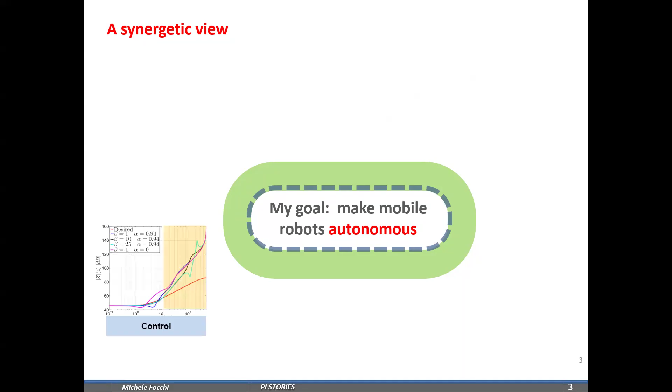To achieve this, we need to cover different topics from different fields. From control, we need a planner that generates trajectories based on the environment that is perceived, and a controller to track these trajectories and reject disturbances. We need some feasibility metrics to know when we are about to violate the physical constraints of mobile robots. In my case, I was working with quadrupeds, so I had many constraints, from friction, actuation, and kinematic constraints. Finally, also state estimation. It's important to feed back the state of the robot that might not be always observable.

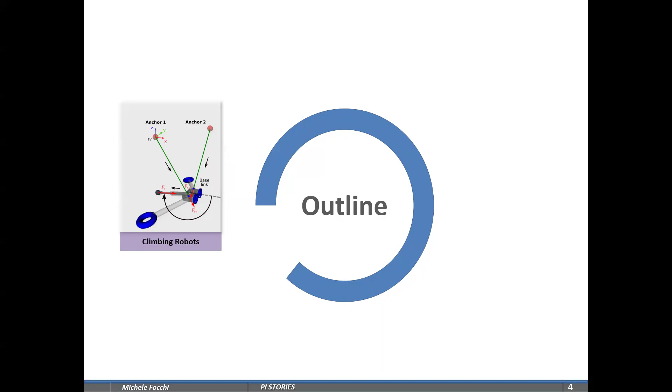The last ingredient is mechanical design, because a smart mechanical design can massively simplify the effort of the controller in achieving our desired goal. In this talk I will focus mostly on control and planning, and specifically I will talk about a few examples of new mobile robots. One is a climbing robot that I presented last year, which is now at the final prototype, so I will present the whole development of the idea. This is quite educational, from the initial idea to the final prototype. And also another work on reinforcement learning, quadruped jump, so making a quadruped learn to jump using reinforcement learning techniques.

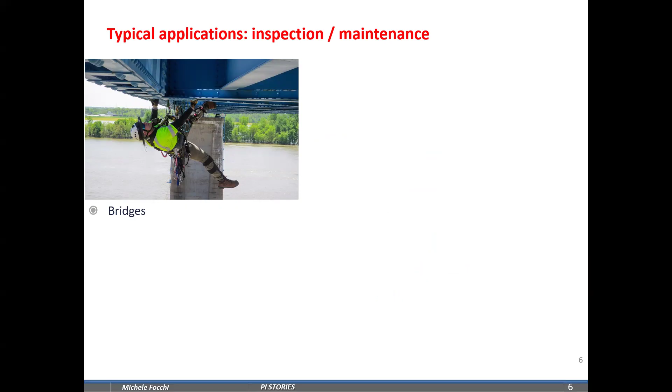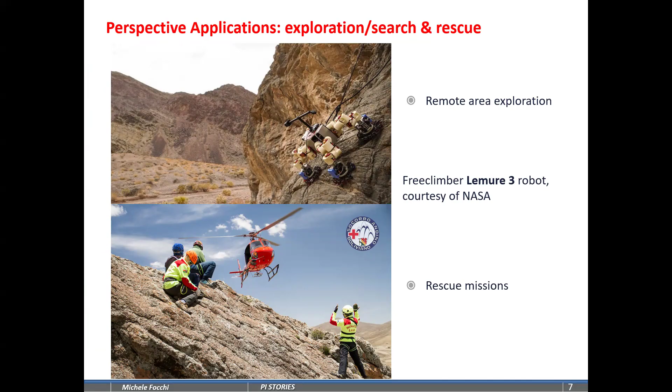First, let me give you a few motivations on why using climbing robots. They have a number of applications ranging from bridge structural inspections, that nowadays are done by humans with expensive scaffolding structures, cleaning of glass surfaces, especially for skyscrapers or high-rise buildings, and recently they've been employed in maintenance on wind turbine profiles. Other applications could be exploration of remote areas and rescue, bringing first aid in rescue missions. But the killer application that I foresee for this class of robots is related to maintenance operations in the heights, on the wall. This has not been explored yet, and this ranges from setting anchors to removing dangerous and unstable boulders from the rock.

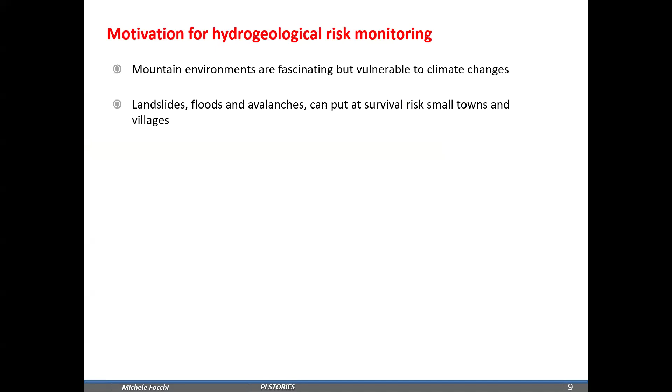Constant monitoring is needed, a maintenance activity to actually monitor the environmental condition and health of the rock walls. But these areas of interest are difficult to reach, and the maintenance operations are dangerous because they're mostly done by alpine guides or skilled personnel that are accessing this remote area through mountaineering techniques and executing maintenance operations while hanging from a rope.

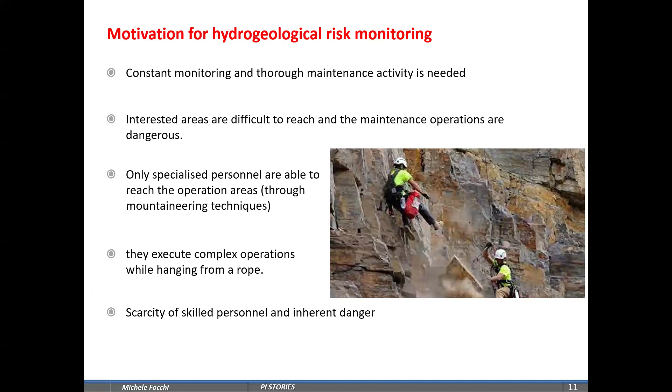And of course, there are not many alpine guides around, so there is a scarcity of skilled personnel, inherent danger, and also the vibration exposure these workers are exposed to. It should be limited by law. So this suggests the application of a robotic solution for this kind of application.

What are the requirements? So whenever we come up with a need, and we just motivated the need of this application, we come up to find some requirements to develop the ideas. And what could be the application requirements that are out of reach from the other solutions, that are mostly done by drones or robots that are crawling very slowly on the wall? First, they should carry heavy payload, and this is, for example, not possible with drones, and maintain a stationary position to perform a maintenance operation for a long time.

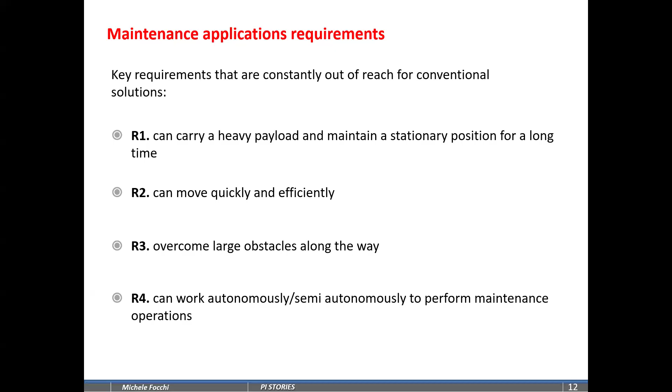They should be able to move quickly and efficiently on the wall, and also be able to overcome large obstacles along the way. For example, in case you have bushes, obstacles, trees that you need to avoid. And they need to be able to autonomously or semi-autonomously perform maintenance operations, for example drilling, expanding foam injection, or debris removal.

The concept is that this robot should be able to move vertically, horizontally, and also be able to avoid the obstacle, enabling some detaching from the rock wall, because the rock wall, as I said, is not a flat surface. It is very rough and there are many obstacles. Therefore, to be able to avoid obstacles, we need this ability to jump, to detach from the wall.

So taking inspiration from human climbers, we propose a robotic solution that is able to move and reach targets along steep mountain walls by exploiting a combination of two ropes that can pull the structure upward by some winch mechanism, so they can wind and unwind the rope and be able to reach any position on the wall, and a retractable leg. The retractable leg is an actuated leg that can push on the wall, initiating the jump.

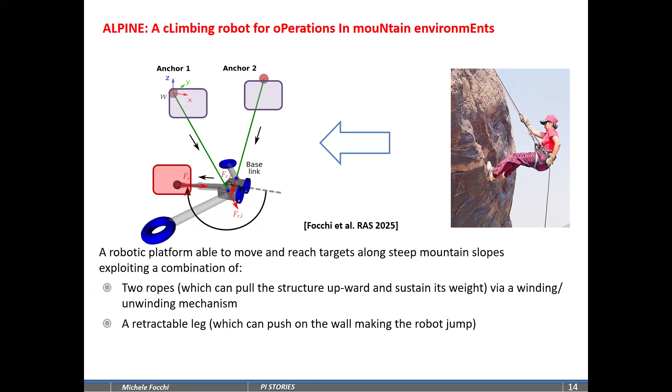Finally, some propellers could be added attached to the base to control the orientation. We will see later. Once landing, to avoid that the robot crashes on the wall in a bad way or tips over, a landing mechanism might be needed to be able to dissipate the excess of kinetic energy.

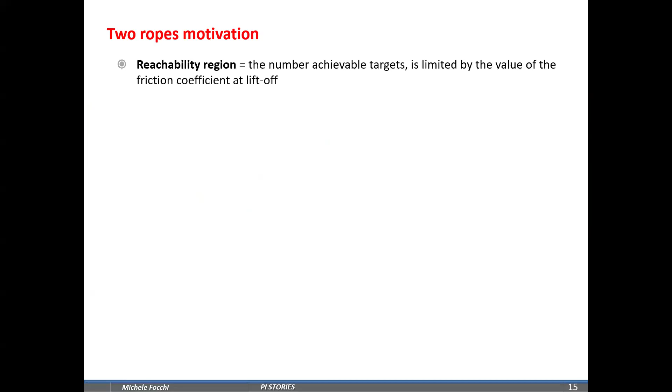The first idea was to use only one rope. So we came up with this robot with a single rope. As I said, research could be an iterative process. It means that you devise a solution, then you test it, and you find out that it's not the optimal one, so you want to do another iteration. And this is very normal in the process of designing a new idea.

And the problem of this single rope solution is that it massively limited the reachability of lateral targets. You see, the optimization we carried out for the jump motion was requiring a lot of effort from the electrical motor driving the hoist, the winches, to get out from the region limited by the friction cone.

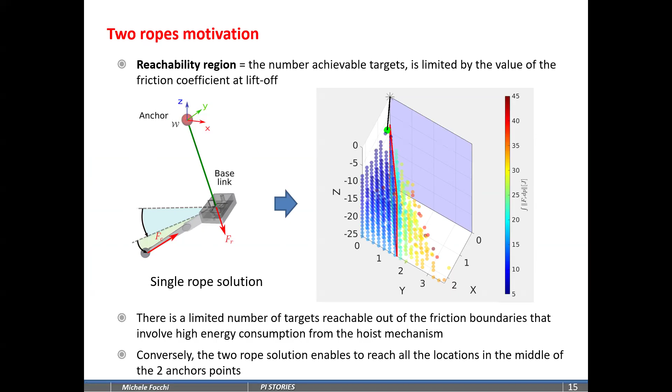So instead, the two-rope solution, adding another rope with another anchor point, both attached to the robot, enables us to relieve this problem and solve this issue. And all the points could ideally be reached, given that the actuators are strong enough, in the space between the two anchor points.

This solution enables us to satisfy all the requirements, because, for example, if we put brakes on the hoist, keeping the ropes in a certain position, we are able to keep any stationary position on the wall without consuming significant energy. So we satisfy requirement 1.

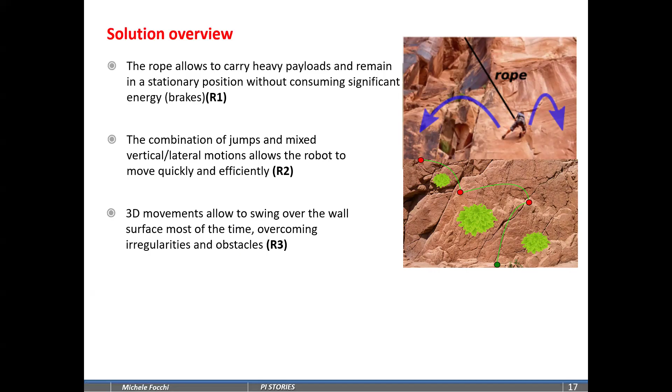Requirement 2 was about being able to move quickly and efficiently, and mixing lateral and vertical motion, we are able to move very fast, taking jumps. And taking jumps also allows us to swing over the wall and overcome the obstacles. Finally, a landing mechanism allows the robot to dissipate the kinetic energy and stay firm on the wall and be stable to perform maintenance operations, which was the fourth requirement.

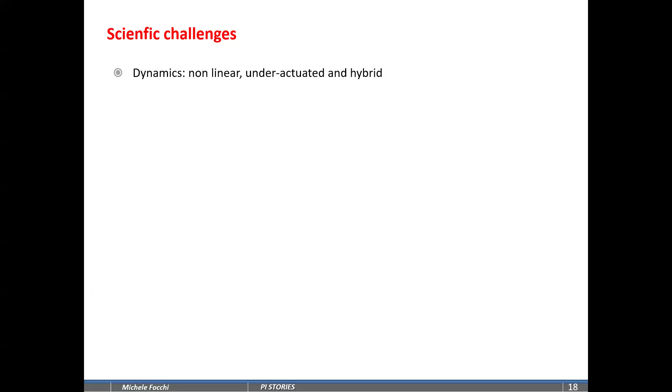However, there are several scientific challenges in this robot. The first one is related to the dynamics, which is non-linear and underactuated. Underactuated means that it cannot fully control its state. For example, when in flight, we cannot control the position of the robot in the direction perpendicular to the robot plane. And it is hybrid. It means that it could have a discontinuous change between being in contact or not in contact.

We have feasibility constraints which are related to the friction constraints. For example, when the leg is touching the wall, it can slip if the tangential force is too big.

Unilateral constraints, which means that the leg can only push and not pull on the wall. And actuation limits, both on the rope and on the leg. And the kinematic limits, of course: we cannot extend the rope and the leg in an infinite way. We have some range. The controllability challenges are related to this unilateral constraint.

So, as I said, the leg is pushing, but it's also pushing in a very quick way, so in an impulsive way. In a few tenths of milliseconds, it should be able to completely extend. This creates some issues in the mathematical implementation of the optimal control problem that we will see later. And the ropes should be able to develop force, but this force should always be a pulling force. So if you don't properly plan the trajectory, the rope can get slack and you lose controllability completely.

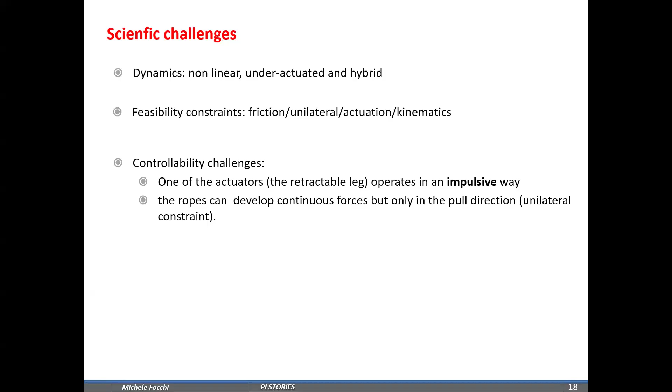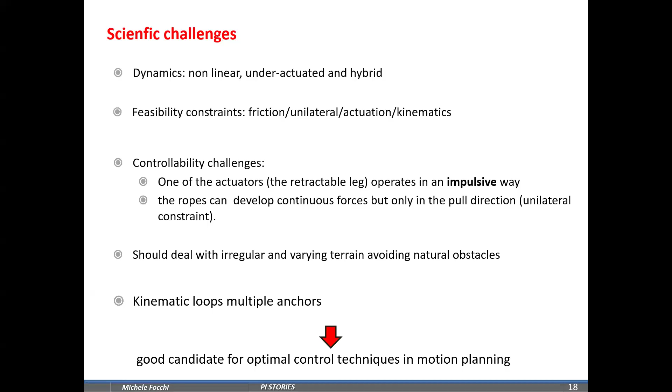We should be able to deal with irregular and varying terrain and avoid natural obstacles, so we need to consider this in the optimization. And finally, because we have two ropes, we have a kinematic loop. What is a kinematic loop? It is a constraint that tells us that the rope lengths cannot change independently from each other, because their attachment point needs to be on the robot. So the change in length of one rope cannot be set independently from the other one. And all these challenges make this system a good candidate to apply optimal control techniques for motion planning.

A reduced order model is a model that captures the main dynamics of the robot. In this case, we neglect the angular dynamics. We consider the robot as a point mass with the mass concentrated at its center of mass. We have a few assumptions. The ropes are inextensible; they can only pull, and they are not elastic. This enables us to boil down the representation of the robot dynamics to only three generalized coordinates: psi, which is the angle between the rope plane and the wall, and the lengths L1 and L2 of the two ropes.

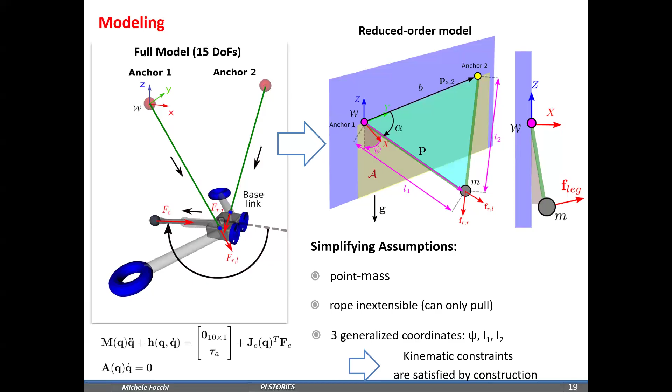The advantage of this kind of parameterization, compared to other possible parameterizations, for example the position x, y, z of the point mass, is that it allows us to fulfill by construction the kinematic constraints that otherwise would have to be enforced explicitly. The famous kinematic loop.

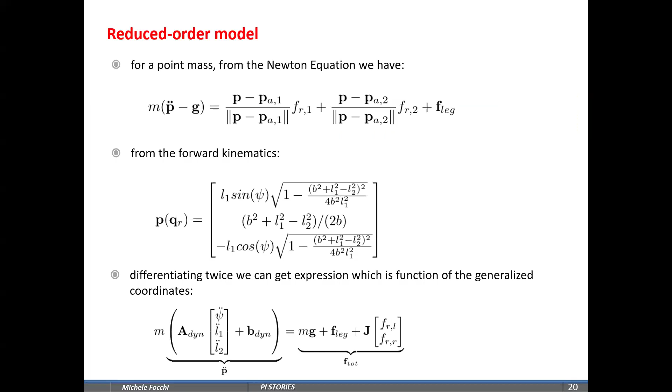The model is a point mass, so we have the Newton equation: mass times acceleration, minus gravity. We have the force of the first rope along the direction of the axis of the first rope, the force of the second rope along its axis, and the force applied by the leg. From forward kinematics, we can link the position of the robot to the generalized coordinates psi, L1 and L2, and differentiating twice, we can replace p double dot with the accelerations of the state variables. And so this is the reduced order dynamic equation, the second order differential equation that represents the reduced order model that we will use in the optimization.

We set up the optimal control problem to find the optimal jump between two points. We employ a direct approach, so we transform the optimal control problem into a nonlinear numerical optimization problem, and we use single shooting transcription to integrate the dynamics, given only the inputs as decision variables. And we do this for the whole duration of the horizon. The duration of the horizon, TF, is also an optimization variable. So it's the duration of the jumping trajectory.

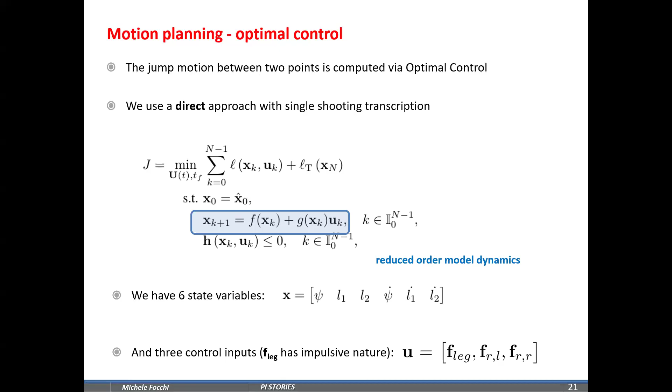As states, we choose the state of the reduced order model and its derivatives, and the equality constraint, which is not really an equality constraint because we use single shooting, is the reduced order model dynamics. As control inputs, we have the leg force, which is impulsive in nature, and the pattern of rope forces for the left and the right rope along the whole horizon.

The cost function of our nonlinear problem has two terms. One is the smoothing of the amplitude of the rope forces, and the other one is the minimization of the work. So we don't want to consume too much energy, and we don't want the rope forces to change abruptly.

Then we have several constraints, for example, the fact that we have bounds. Remember the unilaterality constraints on the rope forces: the rope can only pull and not push, otherwise it gets untight. Limited actuation forces on the prismatic leg, and friction constraints.

So the tangential force, this is a projection of the force on the tangential direction, should be lower than the friction coefficient times the normal force. This is the normal force. Otherwise there is slippage, so we lose the controllability of pushing the leg.

Finally, these are two constraints that are telling us that, for example, the motion should be on one side of the wall and not inside, and we can define whatever generic obstacles, for example, a rock pillar, to avoid as a function of the state. So it's a path constraint actually.

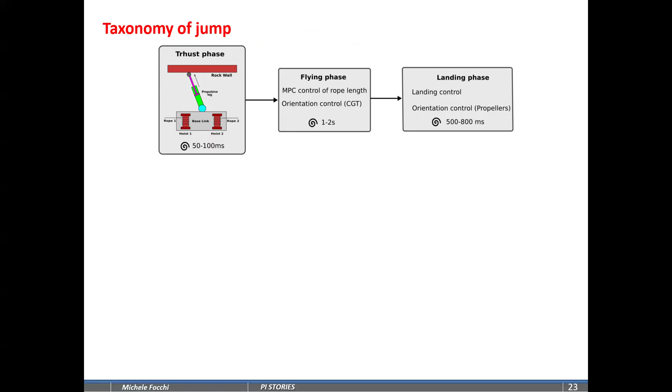Looking closely to the taxonomy of jump, we have the thrusting phase where the prismatic leg pushes, in less than 200 milliseconds, the robot away from the wall to initiate the jump. We have the flying phase in which the optimized rope forces profile is given to the rope to create a motion while flying and land to the desired location.

On top we have a controller that corrects the mismatches that can happen due to disturbances. In addition, we can have an orientation control system that also corrects the orientation of the robot, because remember, we are not considering the orientation in our optimization.

Finally, the last phase is the landing phase, also very short, where the robot lands on the wall and tries to dissipate the kinetic energy without rebouncing, okay? Because if we rebounce or tip over, the robot loses the landing target. We also have propellers that can be activated to push the robot against the wall to increase the normal force. And why is this important?

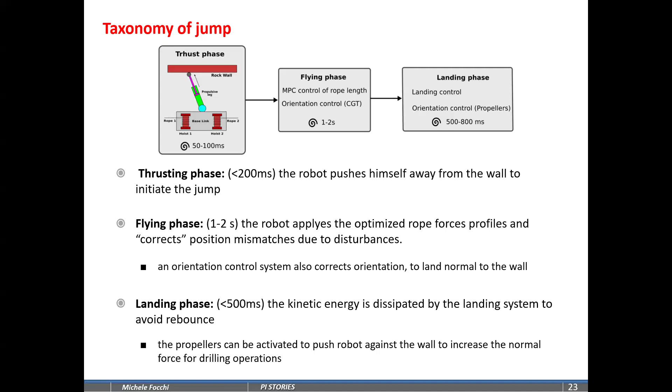Because the drilling operation requires a lot of normal force to be able to do percussion drilling, to break the rock basically. And if you're almost vertical, you're not able to drill because the only normal force comes from the component of the gravity vector, okay? So this is a way to circumvent that issue. We didn't think of it at the beginning, this idea came later on in the project.

So how do we port the result of the optimal control optimization that is done on the reduced order model into the real robot, into the full model in Gazebo, using, for example, 2 passive rotational joints for the anchor point, like a roll-pitch joint, and 3 passive ones on the attachment point of the rope. And we have an active prismatic joint that models the rope. Okay, and we can directly apply the force profile to these prismatic joints.

The leg has a little bit of an issue because the optimization provides an F leg that is applied to the center of mass and not to the tip of the foot. Okay, so the leg is driven by 3 joints: hip pitch, hip roll, and a knee extension, a prismatic one. So 2 rotational and 1 prismatic. And we should use the full dynamic equation of the robot to map the F leg into forces on the prismatic and 2 rotational joints.

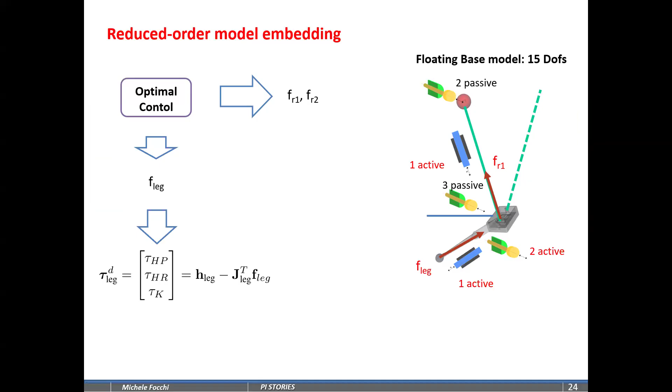We try to align the leg to the direction of the F leg. Why do we want to do this? Because if we have the F leg not aligned, we could create a moment around the center of mass that, once the robot is flying, will initiate a pivoting motion of the robot, and we then land with an orientation that is not desirable.

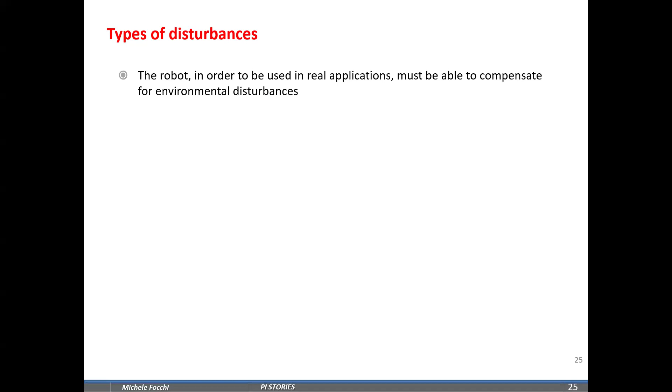In terms of disturbances, to be used in a real application, a robot must be able to overcome, compensate and reject disturbances that are coming from the environment. In the case of a climbing robot, what are these disturbances? Rockfall, which are impulsive disturbances coming mostly from the top, and wind, which is a constant disturbance.

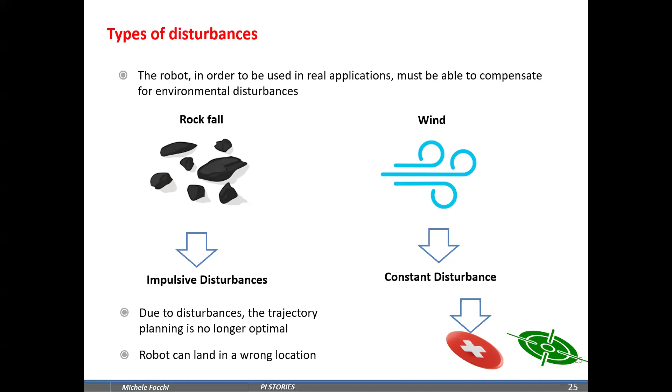If there are disturbances, the trajectory planning is no longer optimal, and the robot, if we don't compensate them, could land in a wrong location with respect to the desired one. Therefore, the strategy we devised to compensate disturbances is a model predictive control strategy that every loop optimizes in real-time the pattern of forces. So we keep the original offline optimization that we solved before starting the jump, and we adjust it according to the error in the robot base.

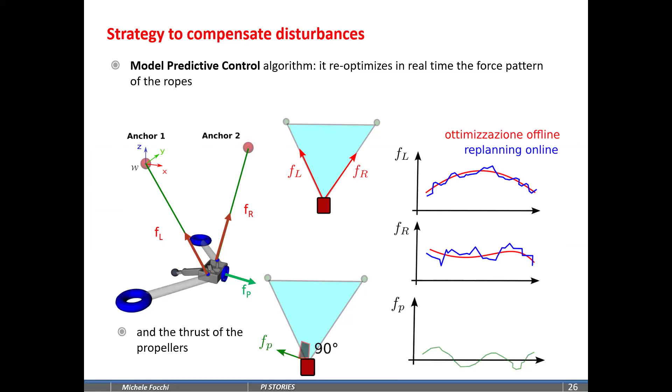But we can adjust disturbances, as we will see in the next slide, only on the rope plane with the ropes, and not in a direction perpendicular to the rope plane. So for this direction we have propellers, and we activate or deactivate a propeller to correct the disturbance.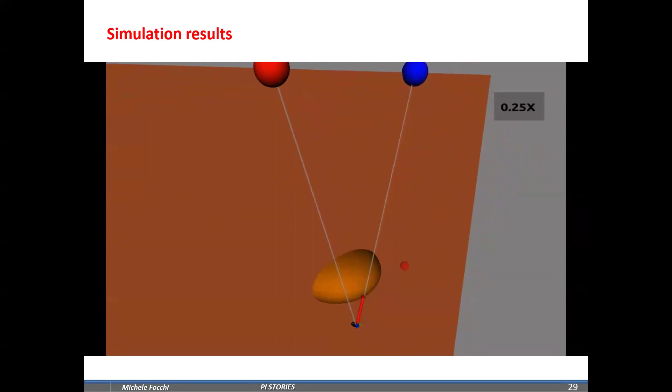This is the test for the obstacle avoidance. You see the intervention of the propeller as well, in blue. This is from underneath. You might not be able to overcome the obstacle in one jump, so you might take intermediate jumps, for example. And this is showing that the approach works for whatever wall inclination. You could have upward jumps with different wall inclinations or downward jumps with different wall inclinations.

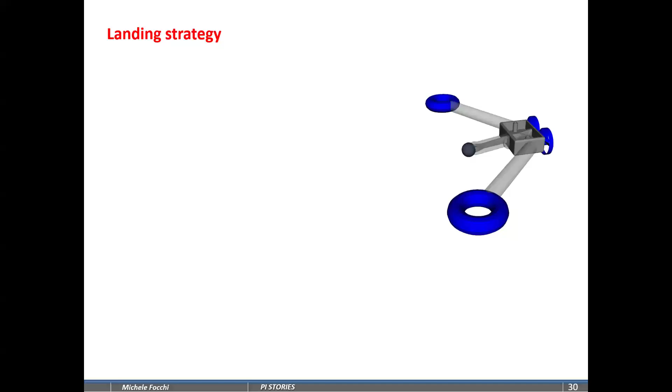Landing strategy: having only one leg to push, the robot is not able to stabilize itself to perform maintenance operations, so we thought about adding two legs driven by revolute joints that create this landing mechanism. During the flight, the thrusting leg is retracted and the two landing legs are extended to manage the landing.

The impact energy is dissipated emulating a Cartesian impedance in this direction, where we set the damping to a critical damping value, and this avoids the overshoot of the velocity, so it avoids the change of sign of the base velocity and the bouncing of the robot. We added two wheels to the tip of the landing legs to avoid the creation of internal horizontal forces, because they could jeopardize the emulation of the Cartesian impedance.

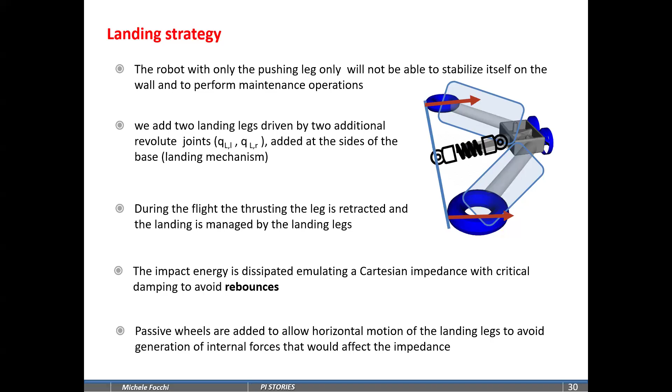And this is the landing test. You see that this is in the Cartesian variables, so the robot in the x direction is in the direction out of the wall. Whenever it lands back, it remains there without rebouncing.

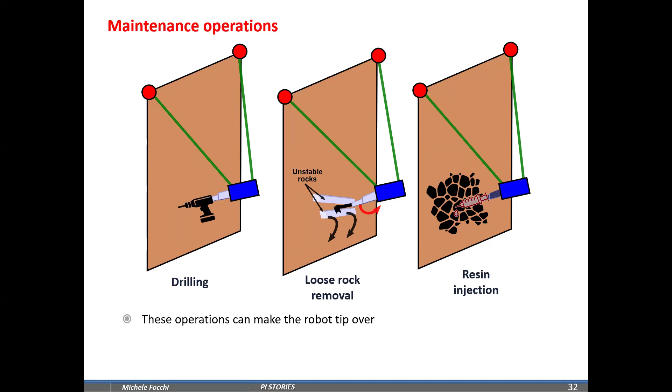Maintenance operations: once we reach the target, the robot is ready to perform maintenance operations, for example, drilling, loose rock removal, or injection of resin. But these operations involve the application of forces on the robot itself. So the forces due to drilling, unless we do something, could make the robot tip over, for example, or lose the contact with the ground. So we need to do a more

Static analysis. Whatever operation we want to perform, for example drilling, we need to estimate the maximum force that we are able to exert on the rock. And for this, we use computational analysis tools. For example, this feasible wrench polytope that we proposed in 2018 is used nowadays in many quadruped robot research studies.

That tells us the polytope, so the convex set of feasible forces that we are able to apply, that we are able to withstand without violating some of the constraints, which are the unilateral constraints of the rope and the friction cones, and also the unilateral constraints on the feet, on the landing legs. And this wrench polytope is a compact representation of these constraints.

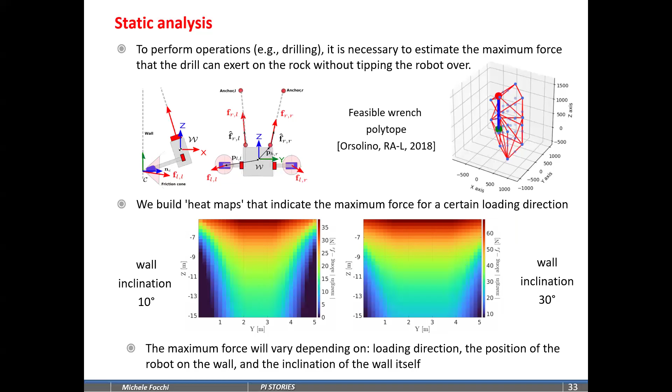And once we decide the loading direction, for example, drilling normal to the wall, we have different maximum forces that depend on the wall inclination. Of course, if you are on a slab, on a less inclined wall, we have gravity that helps us in drilling, so we can achieve higher forces, and it also depends on the position of the robot. So if these are the left anchor and right anchor, if you are in the middle, you are able to withstand higher forces. Finally, this is an idea that came from the reviewer that revised the manuscript that we wrote.

They told us, but why don't you use the wheels for maneuvering on the wall? And this is exactly the virtuous outcome of good work done by a scientific community that feeds back on reviews possible improvement of the papers. And so we added this control of the wheels, which were passive before, but we tried, once landed, to activate them, and this unlocks thousands of possibilities because you can exploit

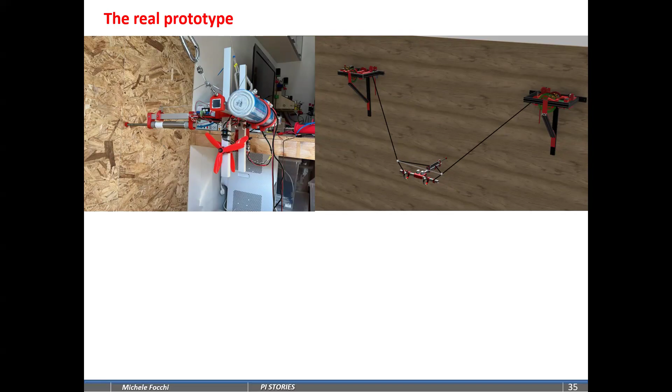And on the right, we have the CAD design. We have the 2 winches and the robot, and these are the ropes. And the real prototype sketch is on the left. In this case, they decided to implement impulsive motion, exploiting a pneumatic piston that takes pressure from a high pressurized gas bottle, while they embedded the brakes and the batteries in the winch.

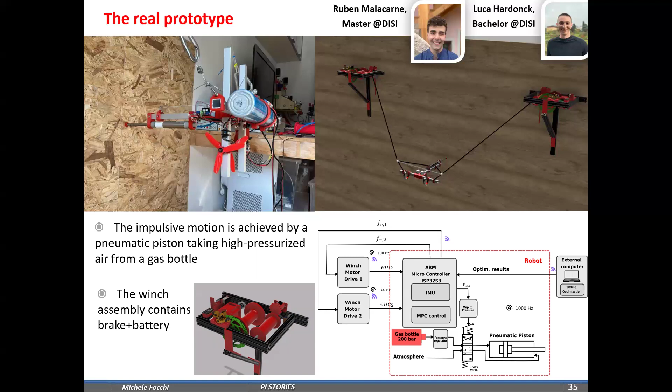So if we have batteries in the winch, we don't have to put them on the robot because we can supply the energy to the robot through the cables that are properly coated. And so we reduce the inertia and improve energy efficiency. And this is a video of the system. Very early

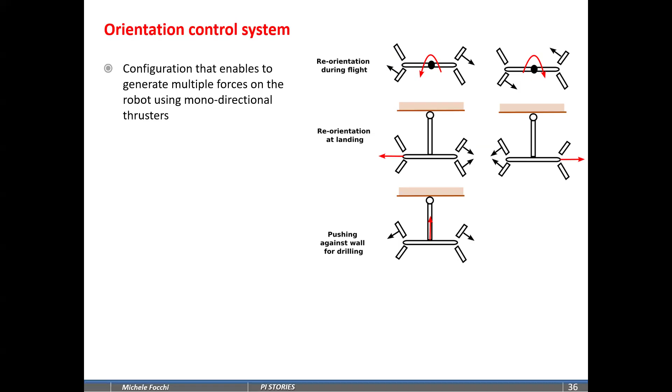tests. Finally, regarding the orientation control system I mentioned before, we found out a configuration of propellers or unidirectional sources of thrust that enables us to do all the forces we need to control the orientation. And we need to control orientation during the flight because the robot could rotate and not land aligned with the wall. We could control the orientation of landing, so think about removing the landing legs.

If we have a way to apply forces on the robot once landed, we can avoid the tipping over. And so we simplify the design of the system, and the actual system becomes cheaper and easier to maintain. And finally, we mentioned applying normal forces to increase the normal force on the wall for drilling. Monodirectional thrusters can be ducted propellers that are more efficient, or even cold gas thrusters. And this is under a patent application, these solutions.

And future works are related also to possible operation modes for the Alpine platform. Think about a geologist that stays at the bottom of the valley, sends a drone to acquire a 3D map of the rock wall, then decides on a tablet what are the points of interest to be achieved for maintenance operation or for inspection or for monitoring, and then these targets become references for the optimization, and the robot will go there.

Then we can decide, with a VR headset, to teleoperate the robot in real time and see the map, the condition of the wall in real time. And then you can decide, as I said, to teleoperate or to apply a certain predefined maintenance operation.

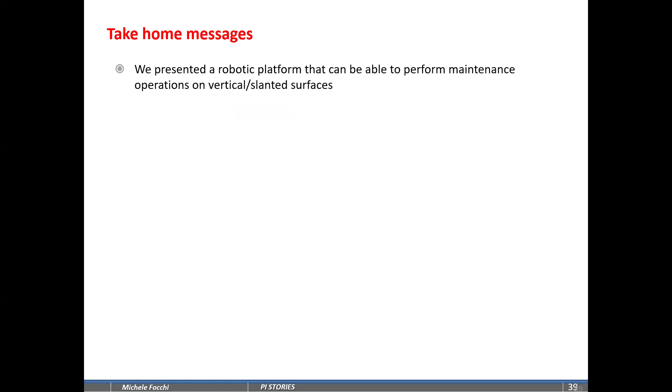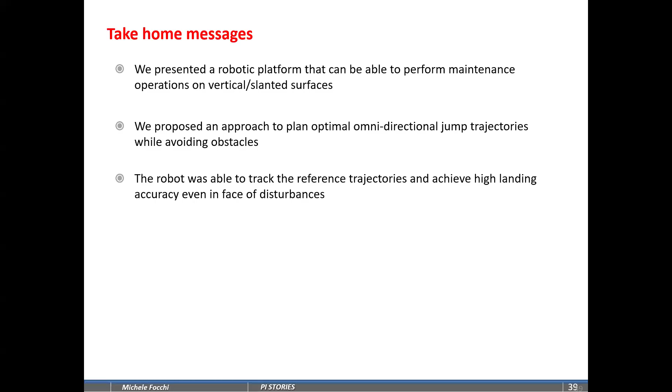Take-home messages: we presented a robotic platform that can perform maintenance operations in a mountain environment, either vertical or slanted. It cannot be overhanging, of course. We propose an approach to plan optimal omnidirectional jump trajectories while avoiding obstacles. And we showed an approach with which the robot is able to track reference trajectories and achieve high landing accuracy even in the face of disturbances. And showed also preliminary testing on the real prototype. The code is available, open source, you can try it yourself.

Okay, we are exactly half of the presentation. We are a bit late. No, let's say not half, 40%, 60%.

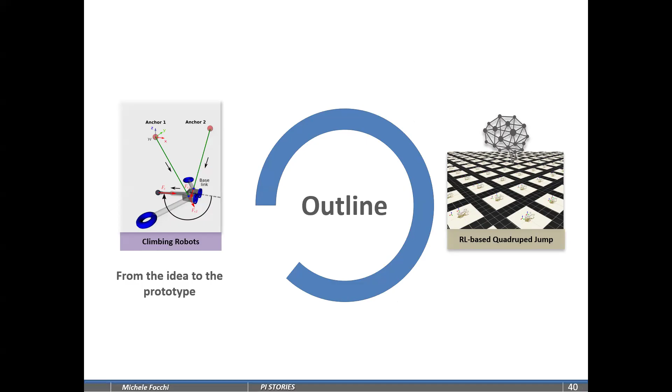The second topic is related to reinforcement learning for quadruped robots. First, why we care about quadruped robots: in the first instance, because they perform better than wheeled robots in uneven and rough terrain, they can offer high stability with respect to humanoids, because they have a big support polygon. They are able to adapt quickly to unpredictably changing environments. They can be used in search and rescue operations, exploration, and industrial inspections.

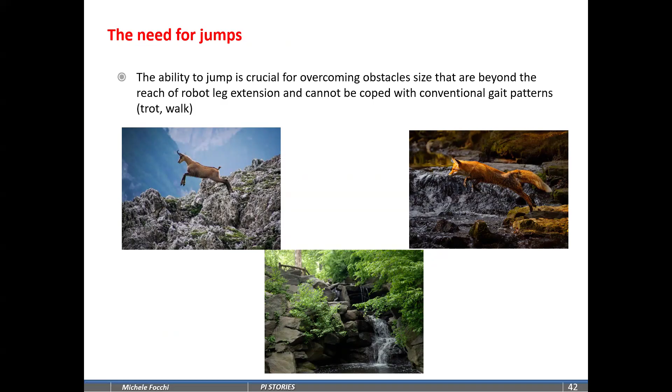And why do we need jumps? Because there are some situations in which the usual classic gait patterns quadrupeds use, like trot and walk, are not sufficient to overcome certain obstacles that are bigger than the leg extension, the size of the leg of the robot. In these cases, being able to initiate a jumping motion could be the solution.

Now, why is jumping difficult? Because it requires quite demanding motion in terms of timing. Its duration is very short, but also in terms of pushing the limits of the robot. So we need to consider many constraints.

First, the extension of the leg is limited. We cannot extend more than a certain quantity. Joint velocity: they cannot extend too fast. We have torque limits. You cannot apply too much force on the joint, and withstand forces. No, this should not be there. Sorry.

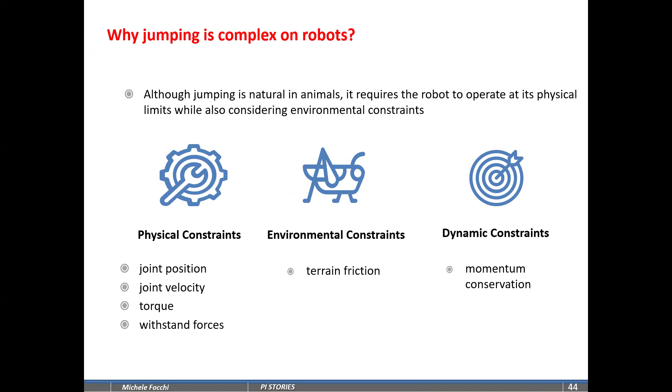Environmental constraints. Again, the terrain has a certain capability of resisting the force, the tangential force we apply before slipping. So we cannot apply whatever force we want. And also, even if we have the torque capacity, dynamic constraints: once we are in the air, we have conservation of momentum, and we lose controllability on the robot.

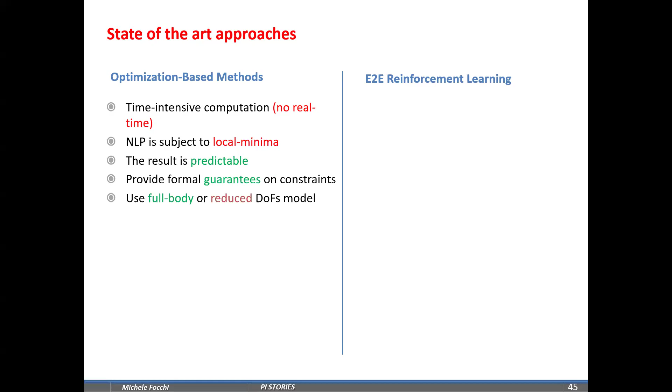How has jumping been tackled in the state of the art until now? We have optimization-based methods that, as I said, are time-intensive computation. They cannot be implemented in real time, or are very difficult to implement in real time. They are subject to local minima. The advantage is that their result is predictable, guaranteeing the satisfaction of the physical constraints of the robot. And of course, it's more accurate if you use the full body dynamics than a reduced order model of the dynamics, but more computationally intensive.

But in the case of the jump, it requires the introduction of artificial constraints. This means prefixed contact sequences and fixed time of flight. For example, to avoid that the system becomes a mixed integer optimization problem, we predefine the duration of the thrusting phase, the flying phase, and the landing phase. But of course, you can have issues because you can land at an instant that is different from the one that you planned with optimization, and this then creates issues.

The other approach is reinforcement learning, in which we learn direct control of the robot by trial and error. So we learn how to apply the forces or the joint reference positions to achieve the jump without any prior knowledge. The result is unpredictable, so there is no guarantee that we exactly satisfy the friction constraints, for example. It requires intensive training and computation, many days or hours of computation to train the system.

But the advantage is that it enables real-time execution, because usually this approach involves training a neural network, which is just a matter of multiplication of weights that can happen in a matter of milliseconds. The solutions that they provide are not always feasible. So, as I said, they could violate the constraints.

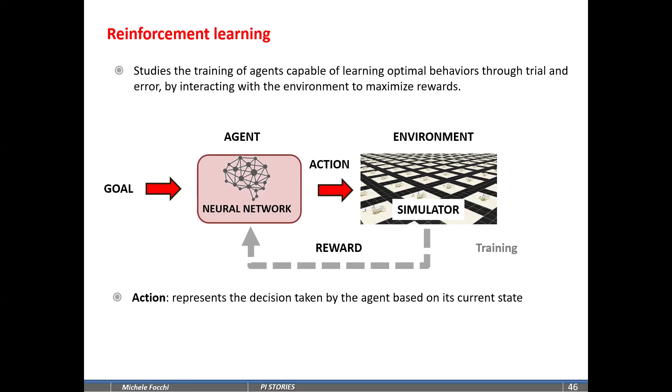So the action represents a decision taken by the agent based on its current state. In our case, the state is mainly the target. So we are here and we want to jump there. So the delta in terms of jump from the actual state configuration. The reward is a quantitative measure provided by the environment as feedback.

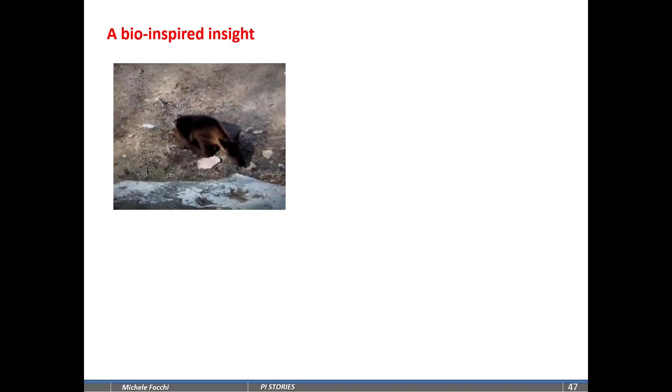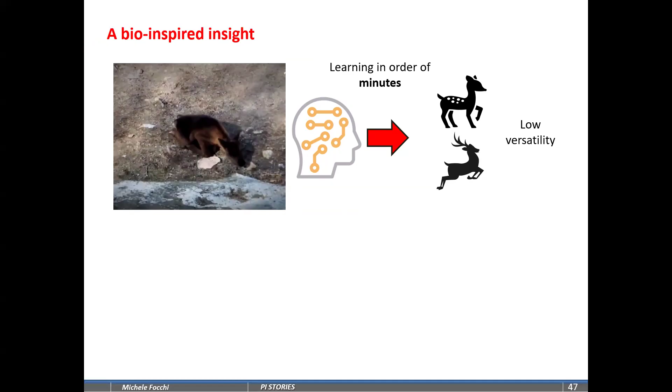Once, talking with a colleague, I was wondering how come animals like deer or other quadrupeds learn to walk very quickly once born, and I replied to myself, maybe these animals have some hardwired mechanism in their brain. On one side, they have low versatility because, for example, a deer is able to walk, to jump, but is not able, like a human, to do different jobs, be an astronaut, a football player. So

a human baby is able to learn many more things, is more versatile, but it requires a long training time before learning all these different capabilities. A newborn quadruped is very fast to learn simple, not complex, locomotion capabilities, but has low versatility. And that suggested to me that a certain level of structure in the neural network should speed up learning.

And I started from that to implement this jumping motion. And the idea is to guide the reinforcement learning using some domain knowledge. So this enables us in a certain way to merge the two worlds, optimization-based approaches and end-to-end reinforcement learning approaches, finding a common ground.

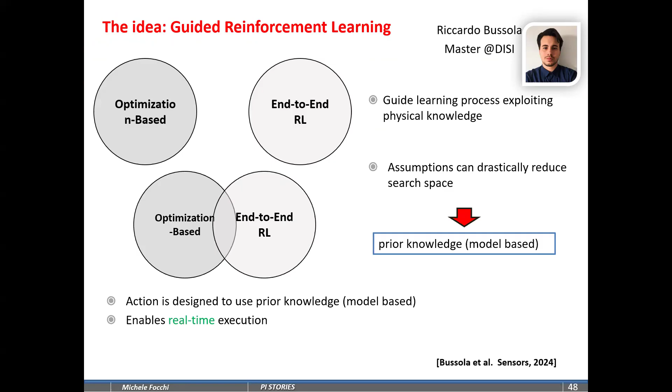The assumption, the guided reinforcement learning, means that we can exploit physical knowledge, allowing us to make some assumptions that can drastically reduce the search space. This is added as a structure to the learning system by model-based prior knowledge. At the same time it enables real-time execution, gives us results that are more predictable than the classical end-to-end learning approach, and reduces the training time in terms of sample efficiency.

Increase the sample efficiency. First, how to reduce the search space dimension? We reduce the action. We cannot apply whatever joint position or torque we want every loop, but we make some observations coming from the physics. The first observation is that the jump trajectory lies in the vertical plane connecting the takeoff position to the desired target location. This means that the feasible velocities are also constrained to the same plane.

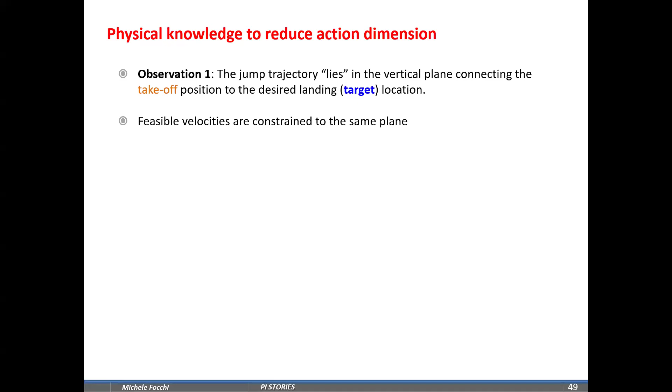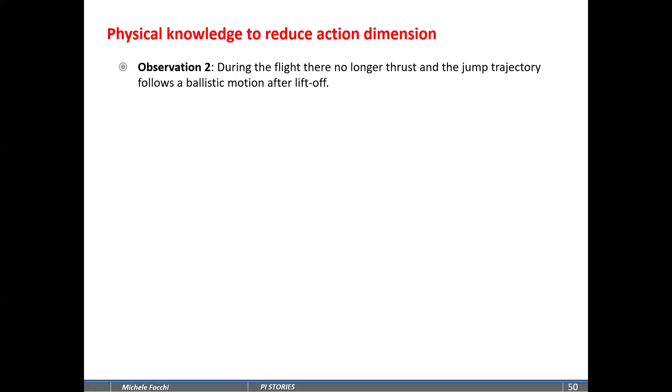And this means that we can restrict the coordinates describing the jump to a convex bidimensional space. This already enables us to reduce the dimension. So if you're considering only position, not orientation, it's already from 3 to 2. Then, another observation: during the flight there is no longer thrust, and the jump trajectory, we said, follows the conservation of linear and angular momentum. This means it follows the ballistic motion of a projectile.

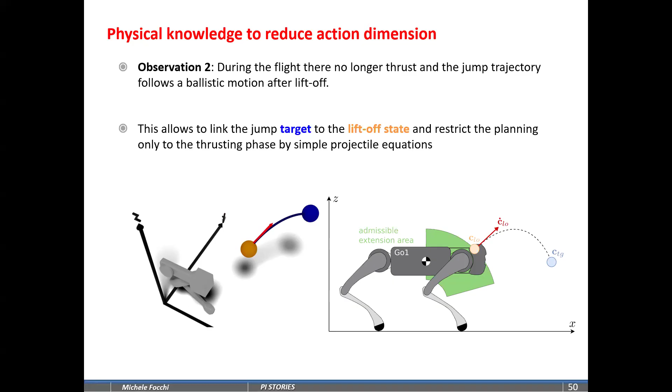This allows us to link the jump target location to the liftoff location, because we know there is a projectile equation that links them. So we can concentrate on planning the trajectory only for the thrusting phase. Okay? So we care only about what happens between here and here. This is the projectile equation. But once we arrive at the liftoff moment, we have infinite combinations of vertical and horizontal velocity that allow us to reach the same target.

For example, you can use a very high vertical velocity for a long time with a low horizontal velocity to reach the target, or a very high horizontal velocity with a low vertical velocity and reach the same target. But of course, the time of the jump will be different. So among the infinite solutions, we want to find the optimal one that also satisfies the physical constraints, because we have constraints on the robot to satisfy.

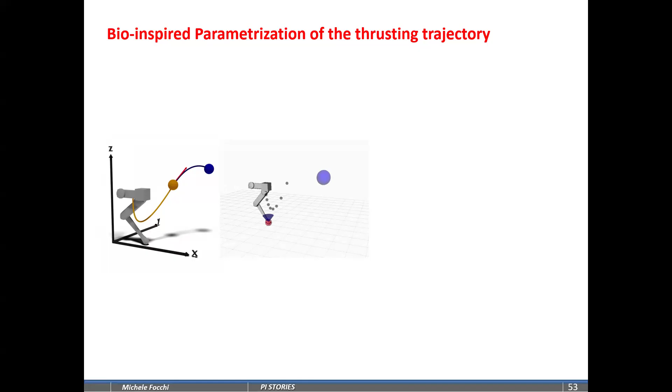How to implement this trajectory? How can we further simplify? It could be any trajectory. We know that we want to link the actual position to the liftoff position, so we want to find the liftoff position and velocity. And if we look at animals, they have a compression phase whenever they jump and an extension phase. The compression enables the robot to exploit the full range of the joints for the vertical or forward acceleration of the center of mass.

We found out that this trajectory has more or less this shape. Of course, it can be different depending on the kind of target, but it is easily parameterizable by a third-order Bézier curve. The third-order Bézier curve has an advantageous parameterization because the derivative is very simple to compute and it is defined by control points, in the convex hull, so it is defined as a convex combination of the control points. So it's quite easy to visualize as well, and we can link the Bézier curve that connects the center of mass to the liftoff position, and changing the parameters of the curve changes the liftoff velocity. See?

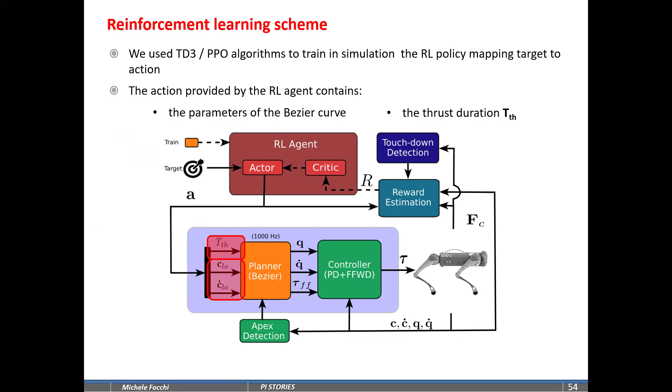So this is the reinforcement learning schematic. We used the TD3 or PPO algorithm to train the RL policy in simulation, and the action basically contains the parameters of the Bézier curve, which end up in a certain liftoff velocity and position of the center of mass, and so in a certain target location, and the thrust duration. So differently from optimization, we are also able to optimize the duration.

The reward function is engineered using domain knowledge to obtain feasible jumps: for example, satisfy the physical constraints and penalize the landing error, so we want to land close to the target. So there are two terms in this reward. The first term is negative and penalizes whenever, in the simulation, the forces violate the unilaterality constraints, so there are forces entering the ground, or the joint torque limits are violated, the joint limits are violated, friction limits, singularity from being too extended, or the robot is not able to lift off.

So we want to discourage the robot from just doing little jumps to reach the target, because this is a possibility: if you don't tell it via a reward, the reinforcement learning process will find that solution. On the other hand, we want to encourage with a positive reward the achievement of the target, so how close the center of mass arrives to the desired location.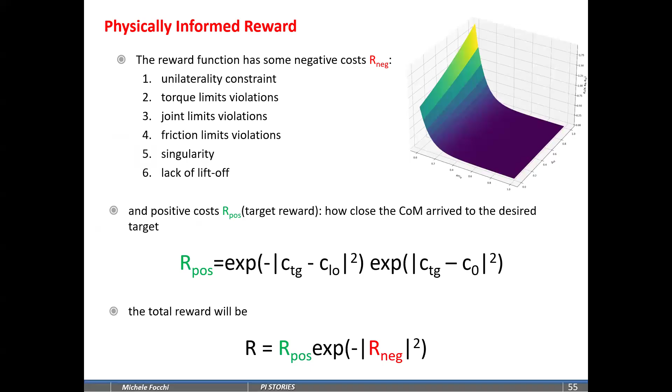Then we multiply the R positive with this exponential of R negative. So we want to have R negative at 0, meaning all the physical constraints satisfied, to evaluate the positive reward.

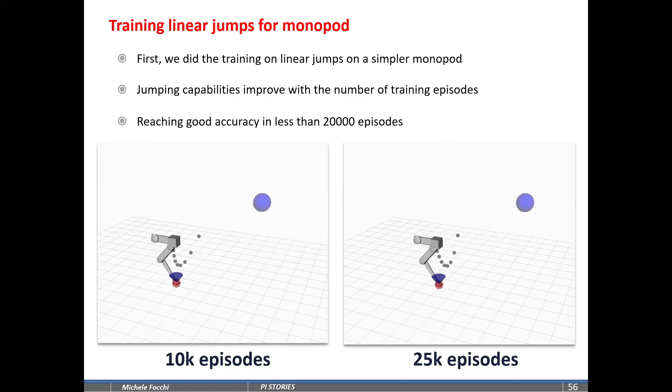First, we did the training on a simple monopod, so we could get rid of the orientation, and we just considered linear motion. And we see the jumping capability improve with the number of training episodes, reaching a good accuracy after 20,000 episodes.

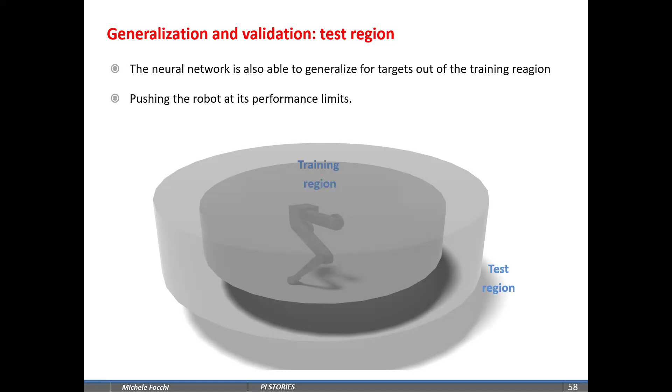Then we also showed the generalization capability of the neural network, asking for targets out of the training region. So this is the test region, for example, and this shows that the robot is pushing the performance limits to achieve that target.

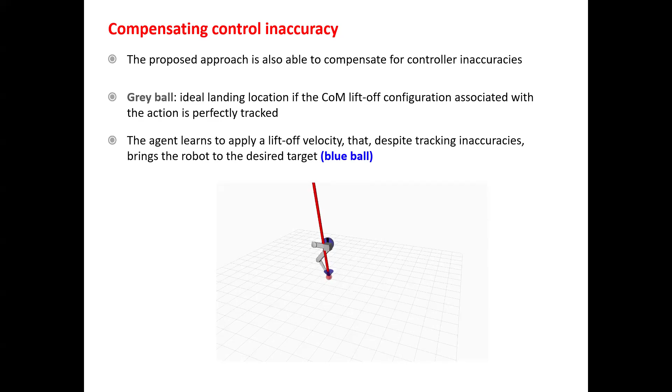So on purpose, the neural network, the agent, is creating an action different from the target one, such that, knowing that the controller will not be able to track this action perfectly, it will land on the desired target.

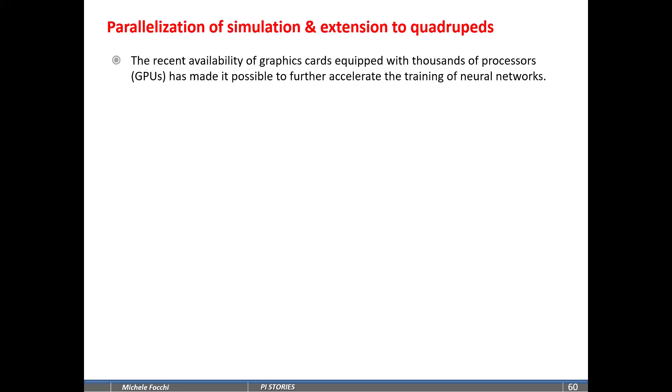Then we moved to the quadruped, and we parallelized the simulation. Thanks to the availability of a GPU card, we exploit that to accelerate the training of the neural network. In particular, we use the Orbit framework and the Isaac Sim simulation environment to train a neural network running 4,000 simulations of robots jumping in parallel. All the experience contributed by these robots goes to the training of a central neural network, reducing a lot the amount of training episodes.

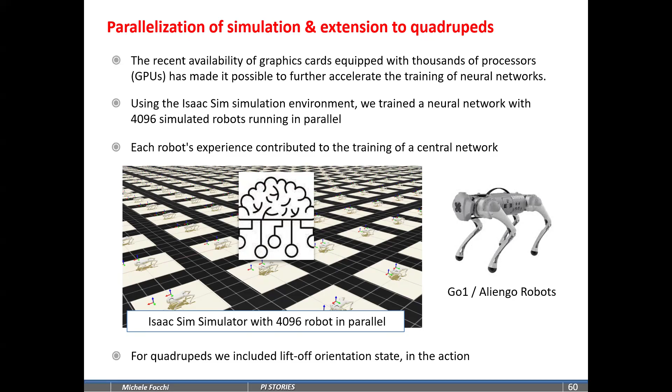In the case of the quadruped, differently from the monopod, we also have orientation, so we included in the action not only the lift-off center of mass position and velocity, but also the lift-off orientation state, so angular position and angular velocity. The training required only 10 hours and only 2,000 episodes, because we're running 4,000 simulations in parallel.

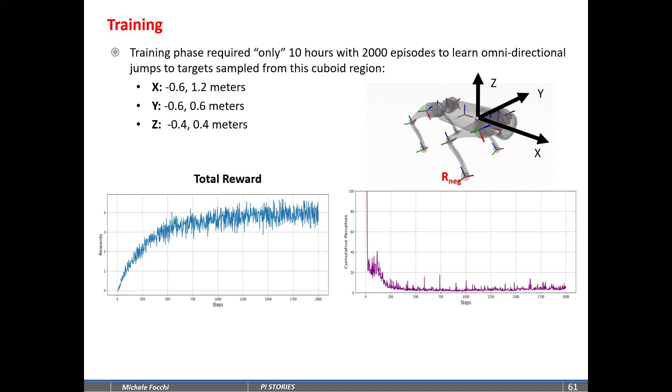It learns omnidirectional jumps in an even larger cuboid region. Note that we are also learning downward and upward jumps. So the jump is not only omnidirectional in the XY direction, but also in the vertical direction. And we see that we have training convergence after 2,000 episodes.

This is a dramatic reduction of the learning phase with respect to end-to-end approaches, which can take up to 33,000 episodes to converge, showcasing that our guided reinforcement learning is more sample efficient. Additionally, end-to-end approaches are very hard to implement because they need a lot of reward engineering. I tried myself to implement an end-to-end approach for comparison for 1 year, and I didn't manage.

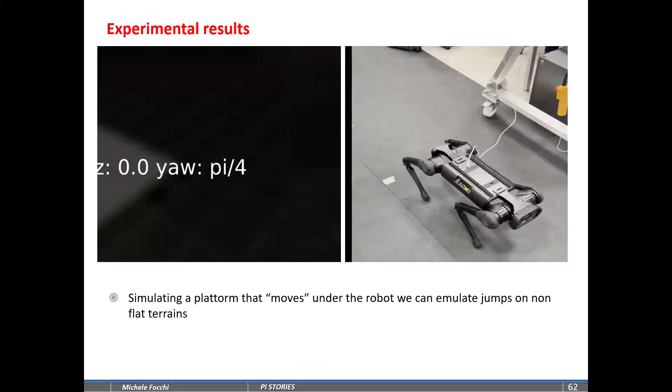Here are the results. To learn how to jump on higher or lower terrain, we basically create a platform that moves with the robot to the elevated target, for example. Sorry, it's not flat terrain, it's terrain of different heights. And here are the first experiments here at the University of Trento with the Aliengo robot.

An important feature of this approach is that when doing experiments, we found it very difficult to estimate the apex of the robot, because we usually integrate the accelerometer, get the vertical velocity, and see when it changes sign. But accelerometers are low quality, biased and noisy, and the jump duration is very short, much less than half a second, which makes a good estimation difficult. On the other hand, the touchdown instant is estimated from the contact forces, which are in turn estimated through joint torques.

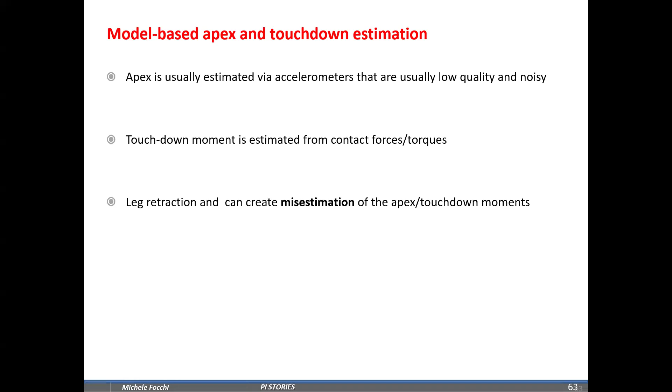And what happened is that during the retraction phase, after the thrusting, we were retracting the legs and extending them. Whenever we were retracting, we were creating a fake acceleration that triggers the apex too early. And whenever we were extending, we created fake forces, because the model was not perfect, that trigger the touchdown too early or not at all. So we were able to jump but not to land.

And the solution was to exploit the fact that our guided reinforcement learning action actually is model-based: it provides an input for a ballistic equation that enables us to predict the ballistic motion and estimate from that the apex and the touchdown instant beforehand. So we just applied that, and from the first trial, the jump worked smoothly.

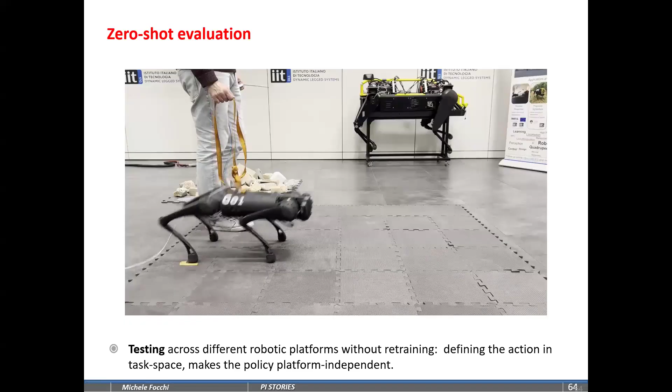We also did zero-shot evaluation of the policy, without retraining, on another platform, for example a Go1 robot. And we see that more or less the jump is working. This is enabled by the fact that we are learning the action in the task space. So we have a lift-off center of mass location and a trajectory that is tracked by a low-level controller, and this makes the approach platform independent. We are not providing joint states, so you don't have to retrain from scratch for each robot.

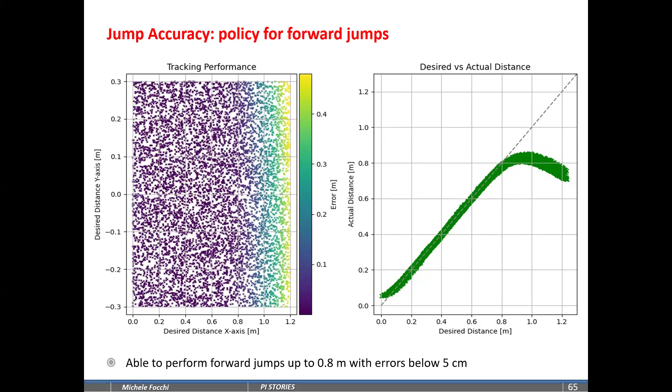Take-home messages: guided reinforcement learning is a strategy used for jumps that enables us to generate accurate omnidirectional jumps on different terrains of different heights. The jump trajectory is computed in a few milliseconds, so it has the advantage of real time, and it is more sample efficient than end-to-end RL, avoiding complex multi-stage reward engineering.

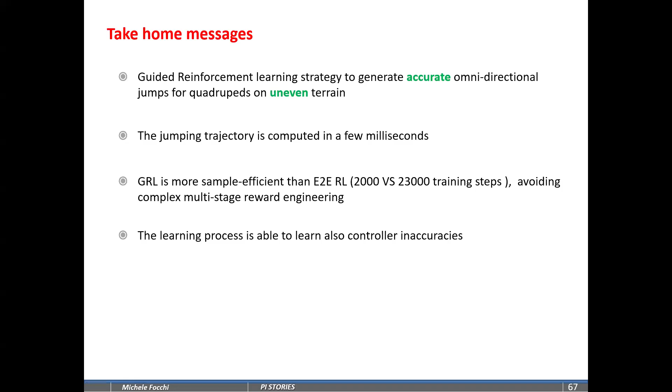The learning process is also able to learn controller inaccuracy, and having a task-based action enables zero-shot evaluation on different platforms with the same morphology. Of course, you cannot use that on a hexapod. Finally, it enables model-based estimation of apex and touchdown for landing.

Also, if there are questions from the audience, yes, online. Can you go to the slide, yes? You talked about zero-shot evaluation, and I didn't really understand what you mean by that. We trained the policy for the Aliengo robot. Then we tried the same thing with the Go1 robot, which is a robot that is 12 kilograms instead of 21, 22. Okay.